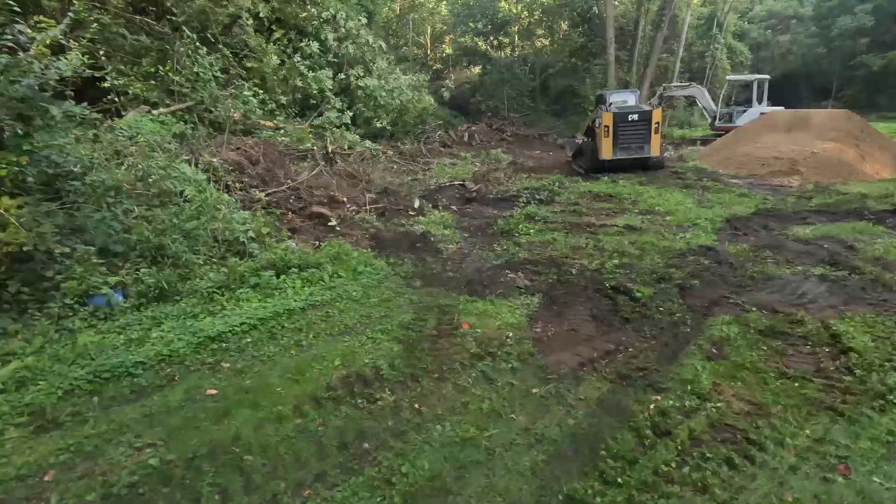We're gonna have a line come out of the house, which is going to be right where that bag's at. We're gonna dig all this up, going all the way back to the tanks back here.

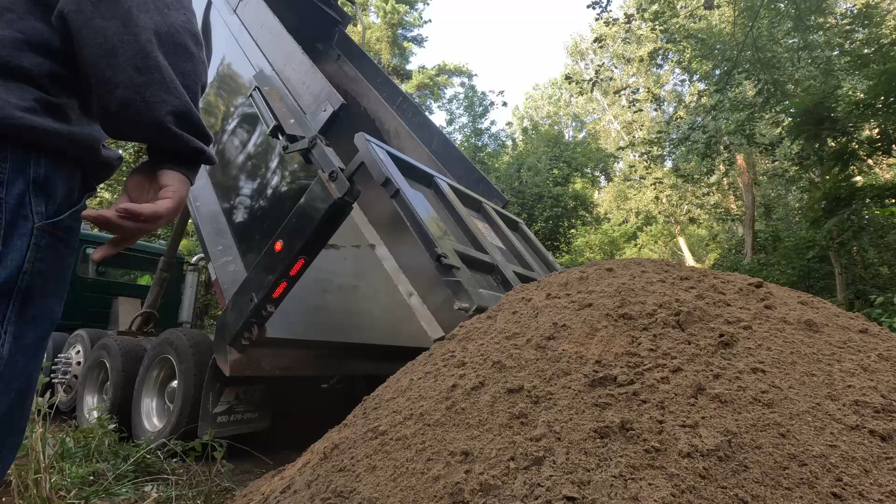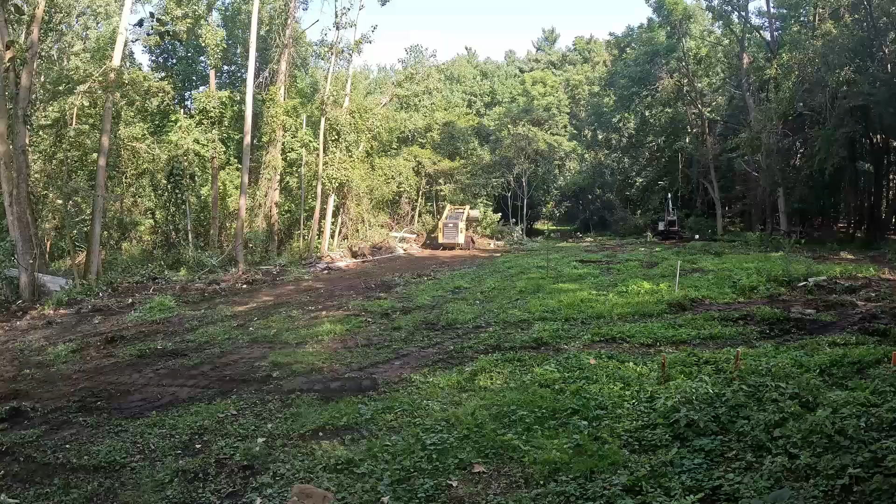Okay, so what we got is a mound system behind me. It's an elevated field system. Here's what it's gonna look like. This is what we get from the health department. You have your house here, you got a septic tank here, and a mound here.

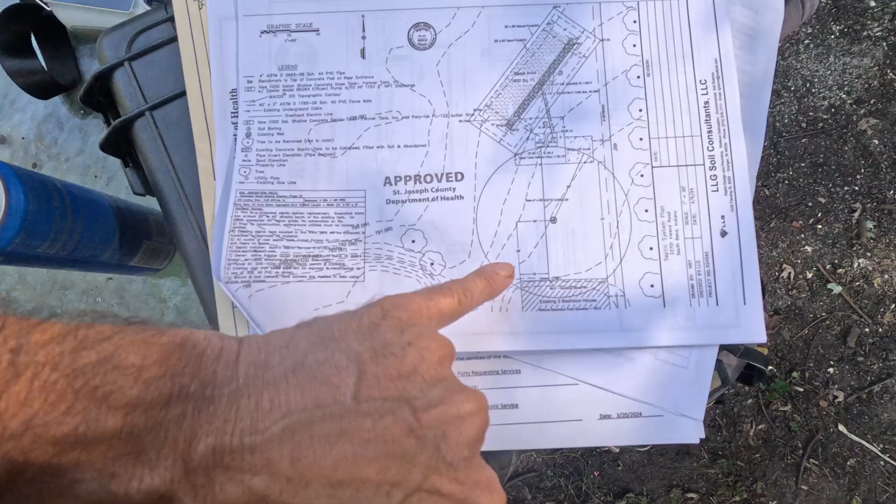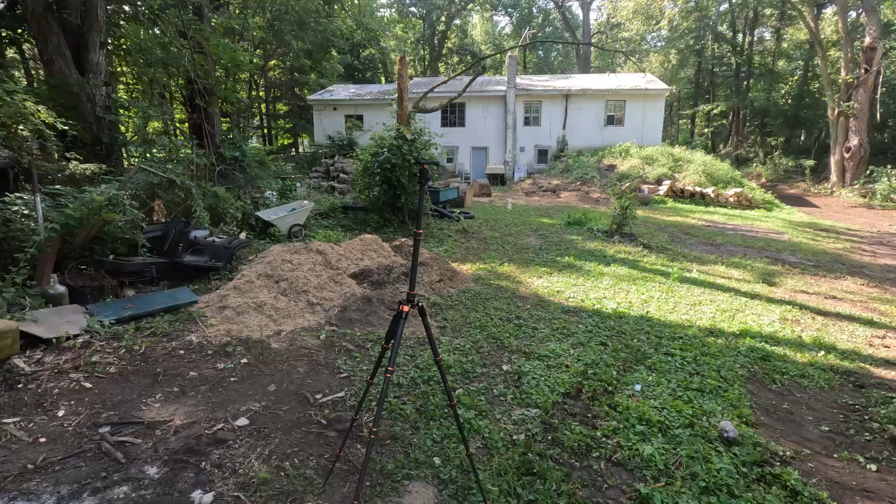So these tanks are right here. There's the house. And we have to be 50 feet from the well. That white thing sticking up is our well. 50 foot is gonna be like right here somewhere.

So once the poop comes from the house, it'll flow down the pipe into the tank, the septic tank. From the septic tank, it flows into the dose tank. From the dose tank, we have a pump inside there that'll pump it out into the mound.

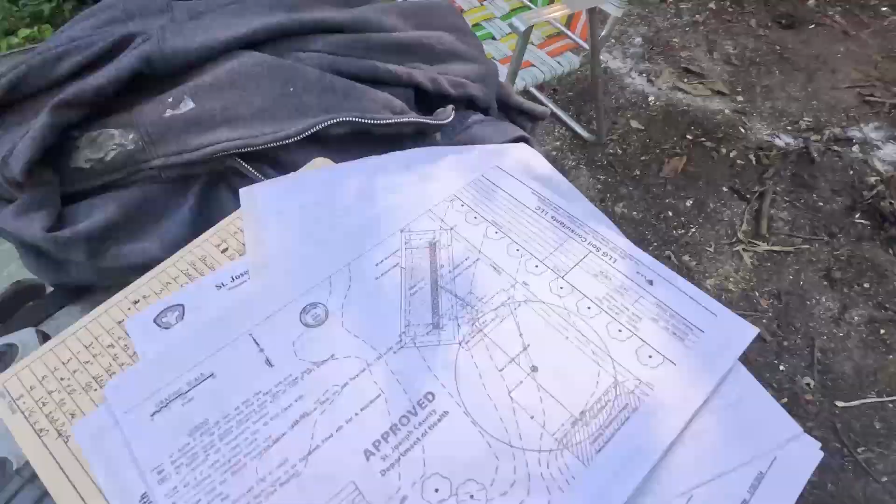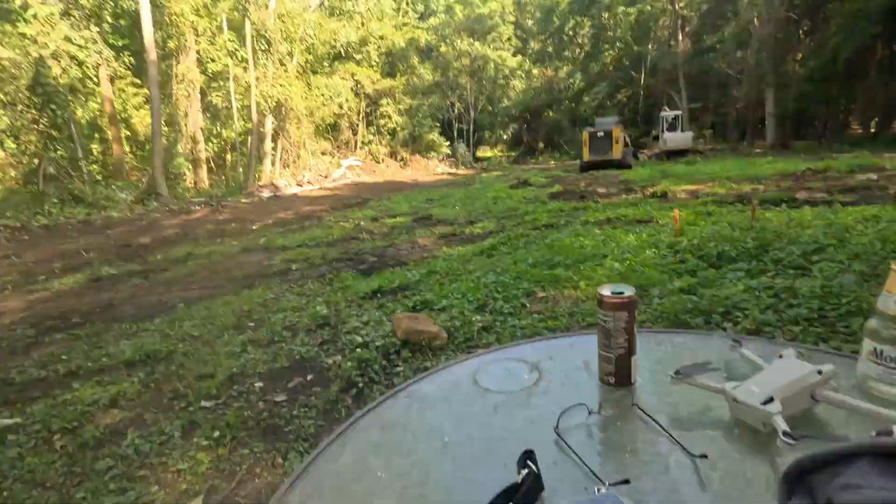So we'll be going from the house, past the well, 50 foot out to the tank. Septic tank, dose tank, right into the center of the mound. From there, it'll pump it up and divide it evenly across your laterals for your system.

Here's our tanks. A 1,000-gallon shallow septic tank and a 1,000-gallon dose tank.

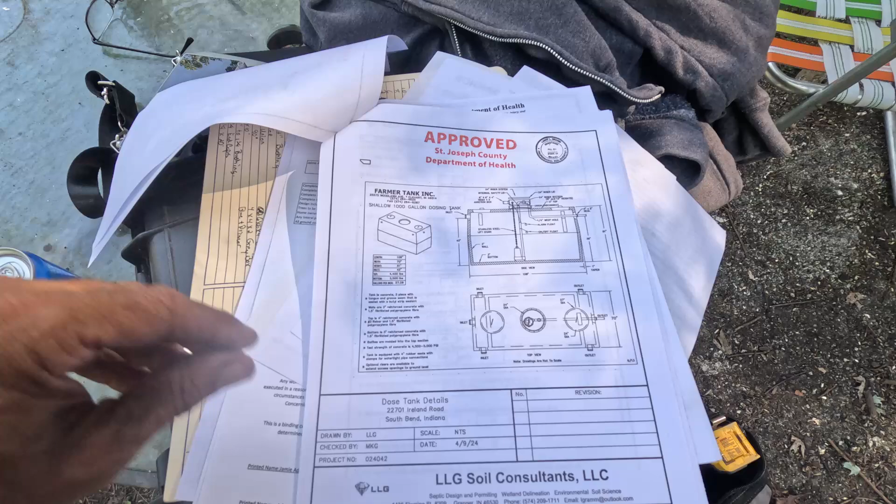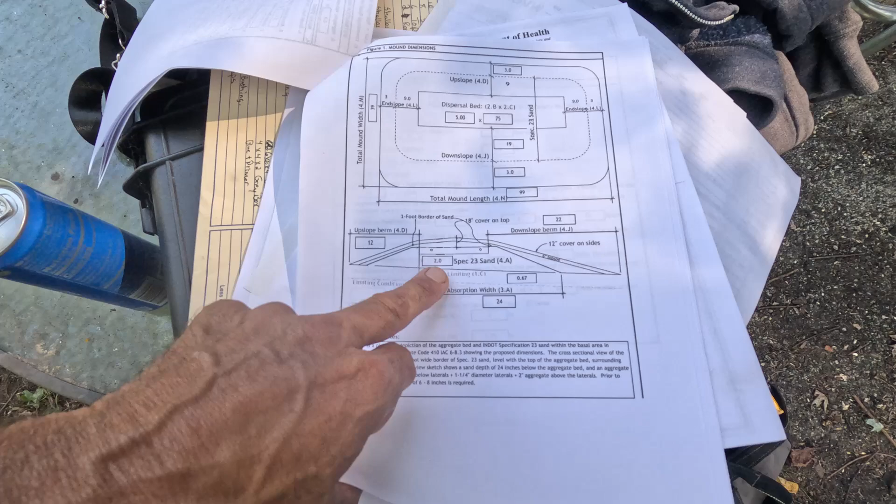Here's all of our numbers we gotta do for the pump curve, there's a mound. It's an upslope mound, and it's got looks like 2 inches additional, no, it's 2 foot. So we got 12 inch additional. So it's actually a pretty good sized mound, pretty tall mound.

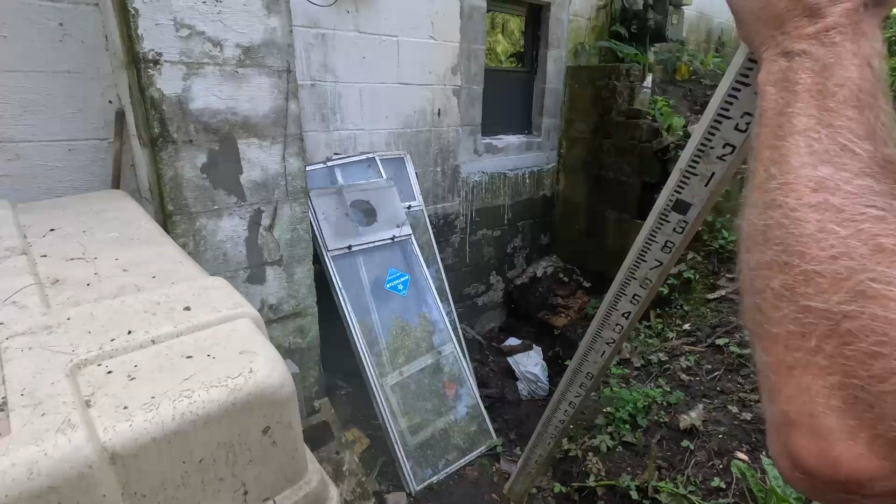So what we have is we have to grab this pipe from the house, and the way to give it fall, we need 4 inches of fall every 25 feet. So we know it's 50 foot, it's actually 75 feet, so we need at least 12 inches of fall from the house to the tank.

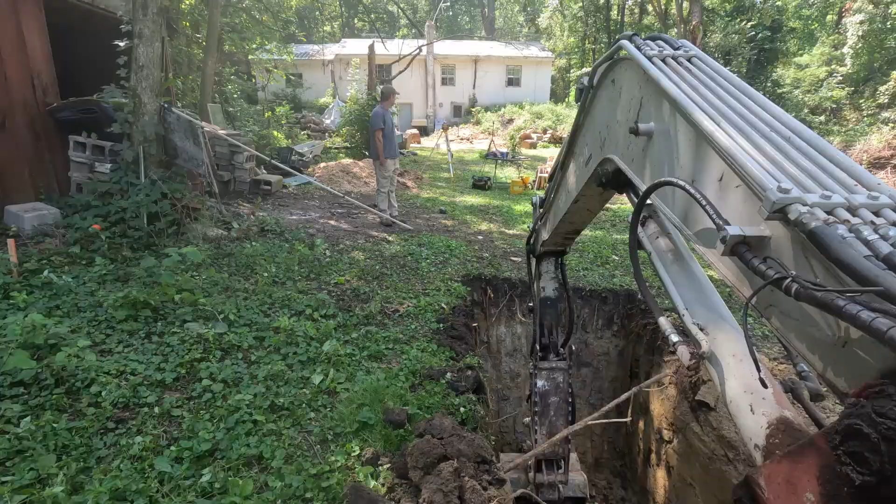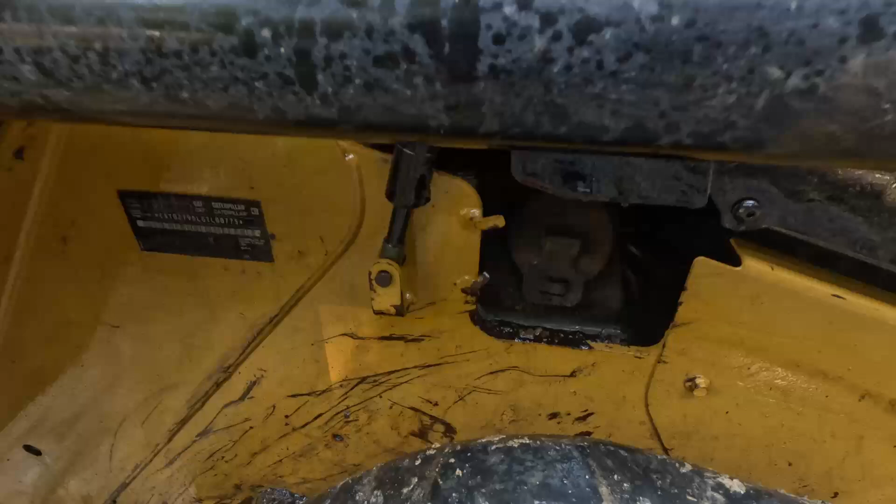Okay, update, maybe done for the day. We blew a line on the skid steer. Hydraulic fluid everywhere. Blew a line right down here. It's rubbing and it blew. What's messed up is that we just did this side like 2 weeks ago. This side blew. We had service come out and replace the lines, and now the other side blew.

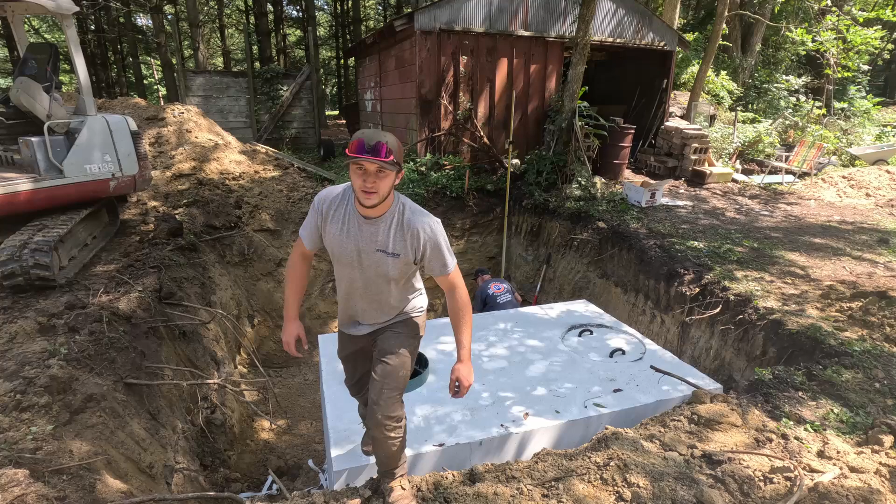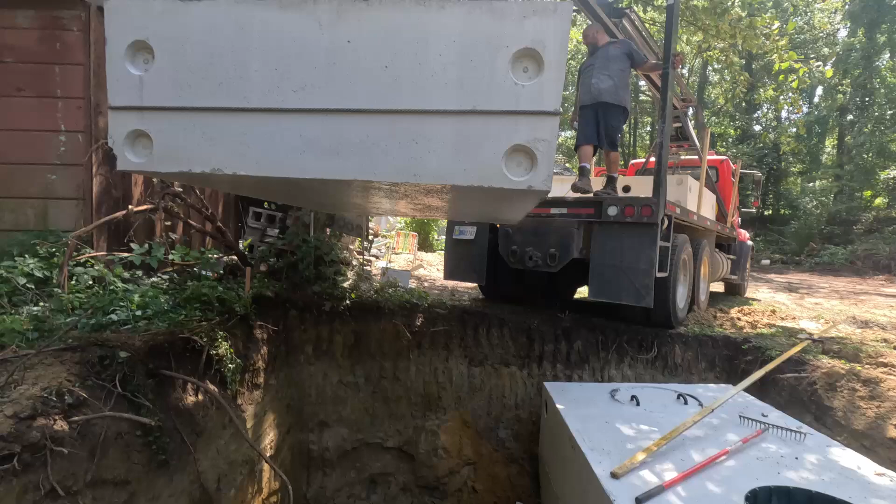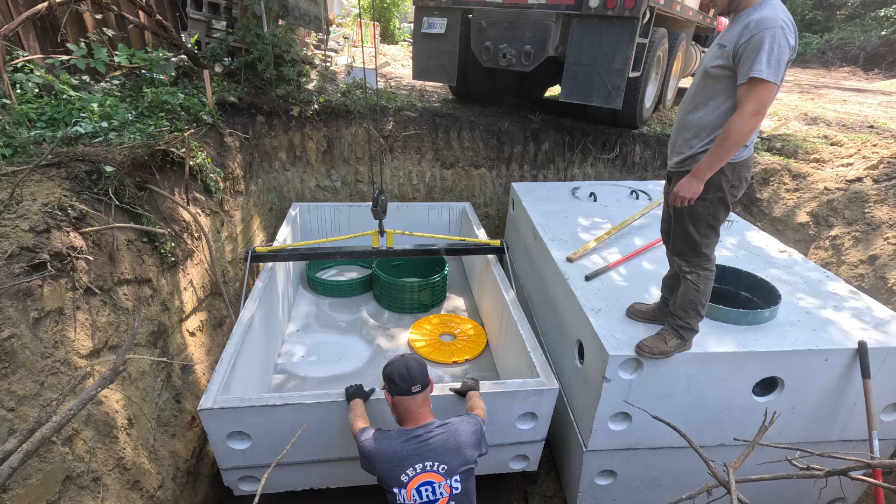One in the ground, one more to go. Alright, well, we'll let it down and then I'll put some flak on it and move. We're gonna hit that front wall. Just here, Jay, just so I can get it down.

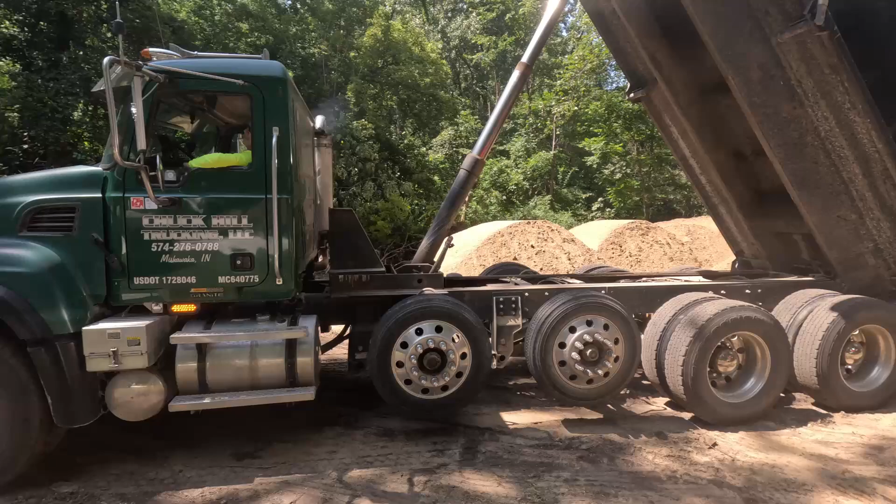Hey guys, well, here's an update. Skid steer broke down, we called it a day. We are going to come back tomorrow and do our force main and probably our supply line from the house to the tank, get that stuff done, and then hopefully the service tech will be out there in a day or two to get the skid steer fixed. If not, we'll bounce around, hit a couple different jobs, and then come back to the job and knock her out here in a few days.

Good morning, it is Monday morning. We are back in the mound. We had the skid steer fixed Friday afternoon, so we can get back to work today. I don't think we're done yet.

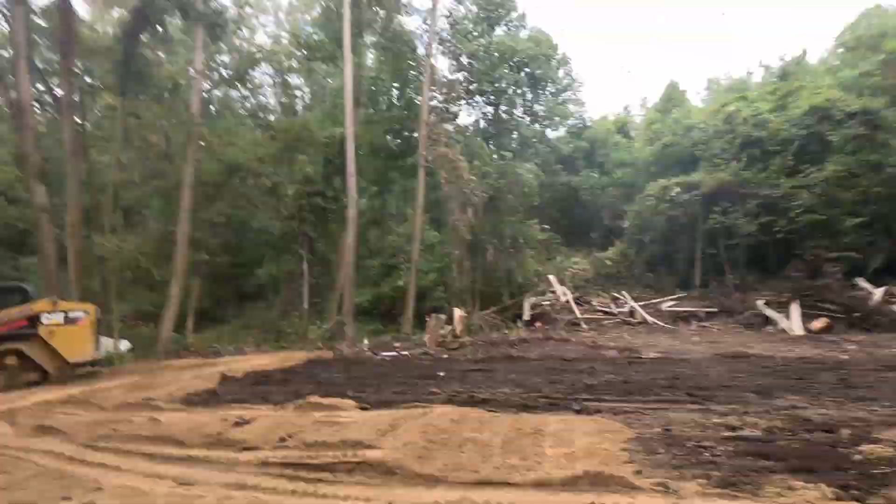Okay, so we had an inspection today. It was a rip inspection. So what we have to do for inspection is you got to plow the ground. They want to plow it down, I think it's 7 to 14 inches, I believe. So we took our ripper there, and we ended up just dragging it and ripping the ground.

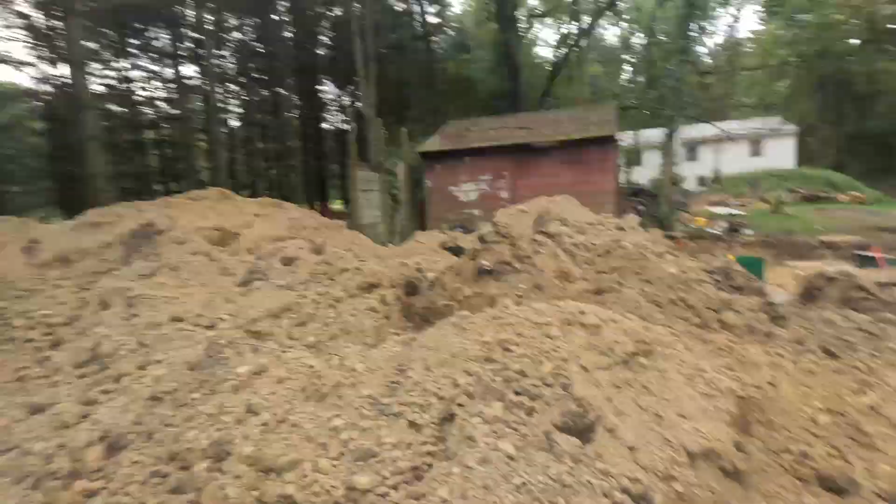Then we got Keegan, he's got to throw 6 inches of sand on the base, and we can't drive over the actual tilled up part. We got to drive on the sand itself. Once he gets that done, what we'll do is we'll lay the ag bed out, and we'll start throwing sand and rock in for your ag bed.

And then tomorrow we'll have inspection, a lateral inspection tomorrow.

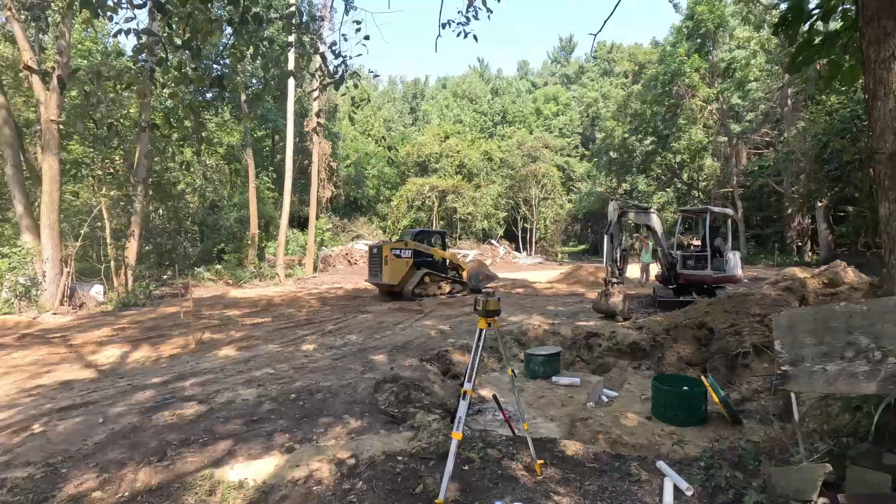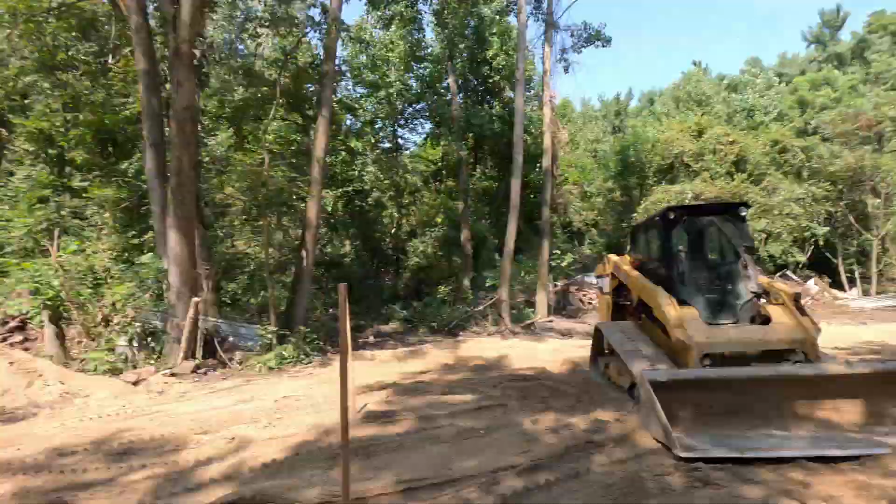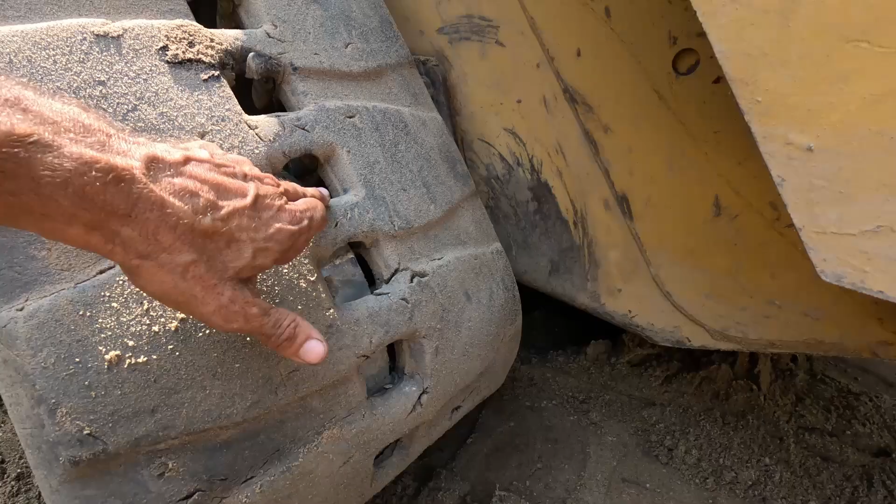Okay, here's a mound update. I think this property is the Indian burial ground, so we're having some bad luck here. The cat guys just came out, got the track fixed, or I mean, sorry, got the hose fixed on the outside. Then we're driving today, see that big old bulge there in that tire? That track I mean, this big old bulge ain't supposed to be here.

What happened is the bar in the middle blew out, so our track's gonna come off, so we are stopping again. This is breakdown number 2 on this mound, breakdown number 3 for this year on that machine. Buy a cat, they're good, but they're gonna be expensive when they break, that's for damn sure.

Good Friday morning for a holiday weekend. Today's plan is to put our new tracks on our skid steer.

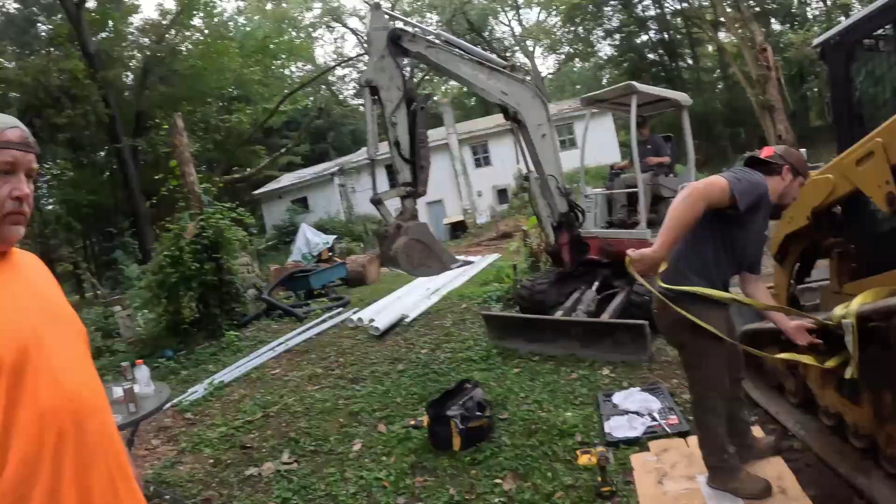So we got to raise that track up to pull those together to pull the track off. What we got to do is by raising the rubber up, we're going to collapse this in, which pushes the grease out. That'll give us room to slide the track off. We should go in probably about 2 inches, looks like. Yeah, maybe, it looks like it's going roughly about 2 inches.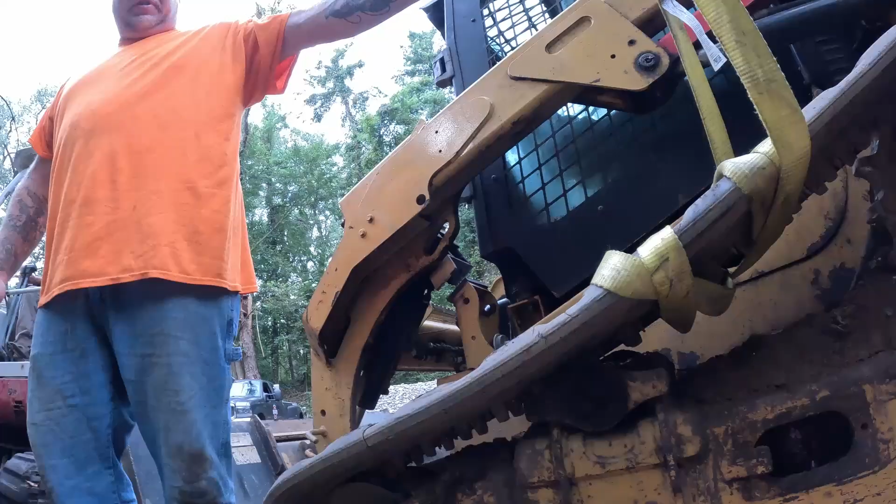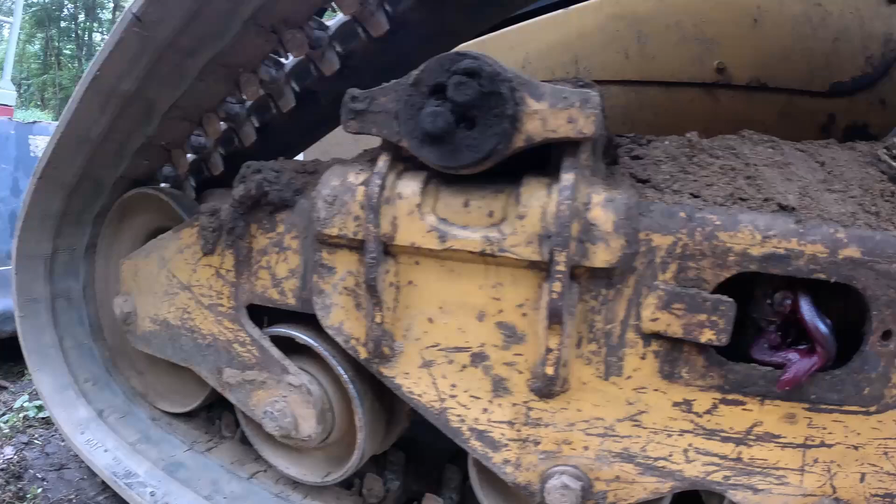But this here slides inside that cavity, and it's pressured by grease. So as we pull up on this, pull up on this with the excavator, it will sandwich this together. May even show up a little bit more. Keep it going, nice and easy. That's pulling in, the grease is oozing out. Look at all that grease.

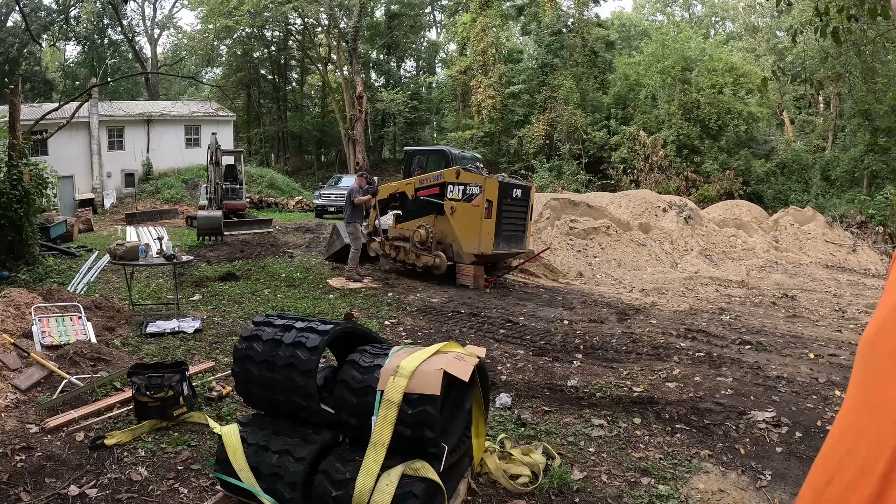So as you can see, we got the tracks off on this side. Here's the new tracks right here. Can you see them? There we go. We got new tracks right here, we're gonna put them on. That was kind of a pain in the ass because we're on unstable ground, but we'll get her on.

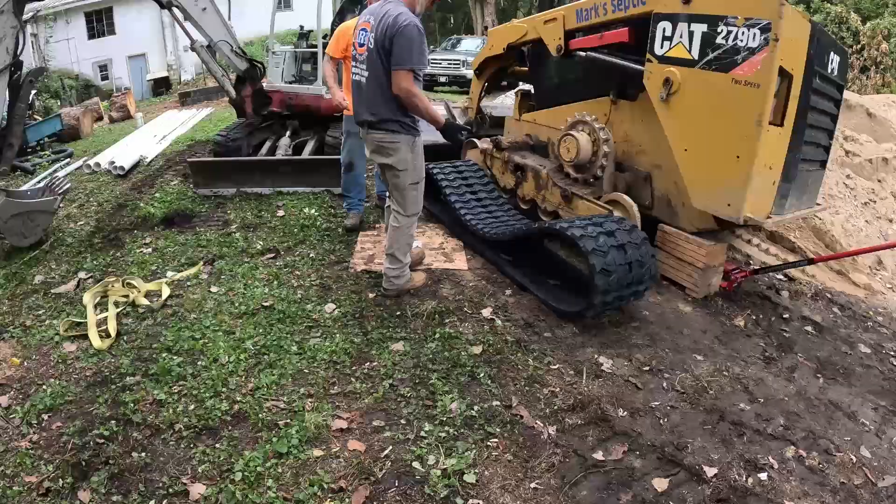Look at those pretty shoes. Nice. All right, now comes the fun part.

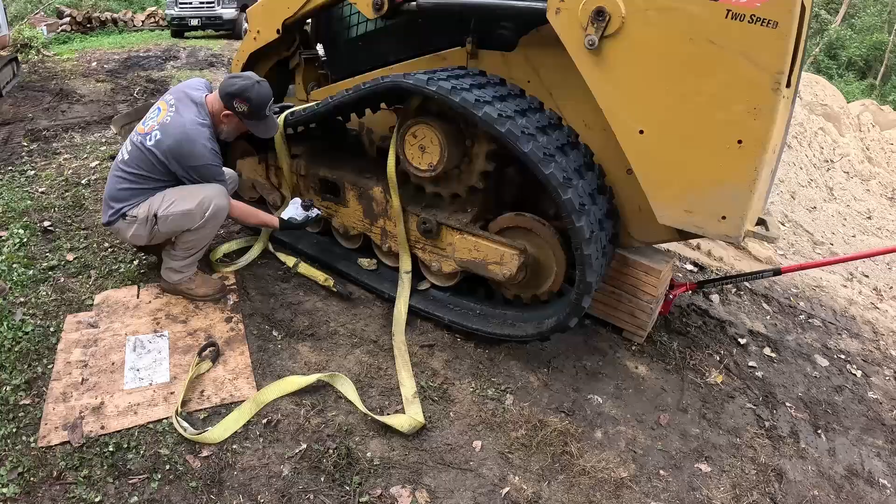Looks weird. New shoes. Skinny and Hefe did it again. Oh, Hefe and Skinny, saved the day.

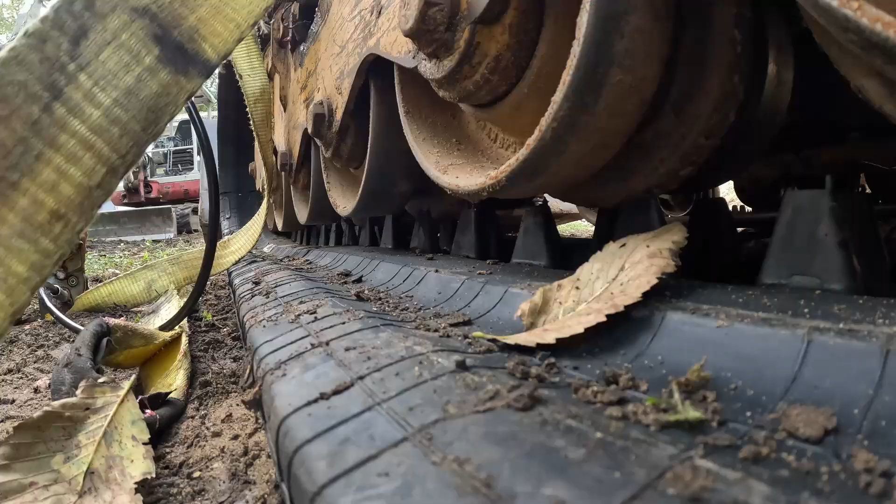Okay, by putting grease inside there, inside his grease joint, it's stretching that piece out, which is causing this to tighten up here, which also causing this to go straight.

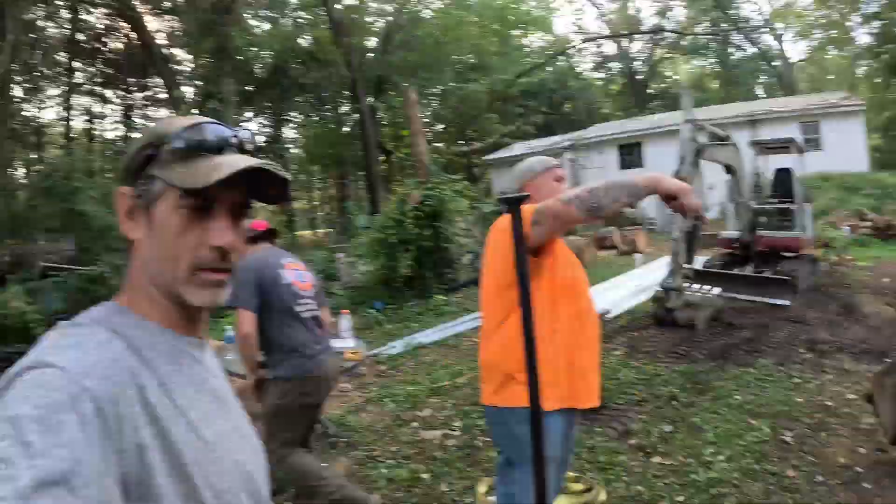Beautiful. Let that come around, we'll spin them over around. Beautiful, beautiful, that's how you do it. Probably not the correct way, but that's how we do it. Back it in. All right, side one's done. We're gonna flip around and do side two.

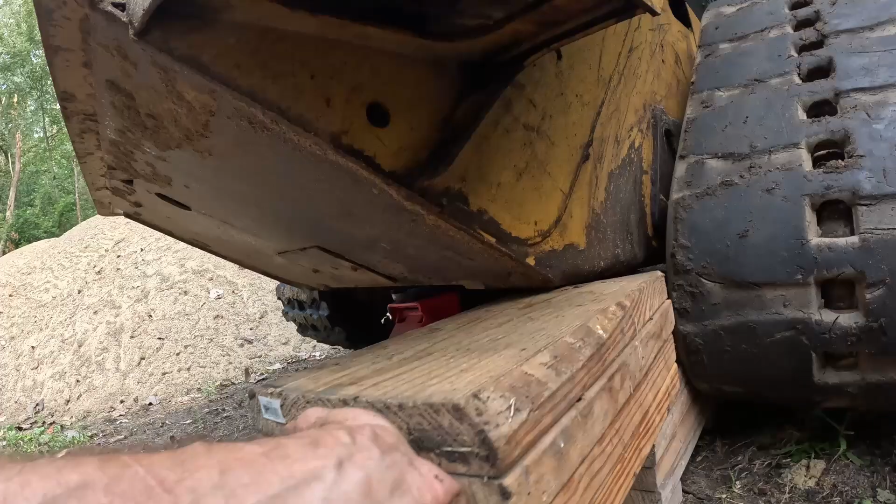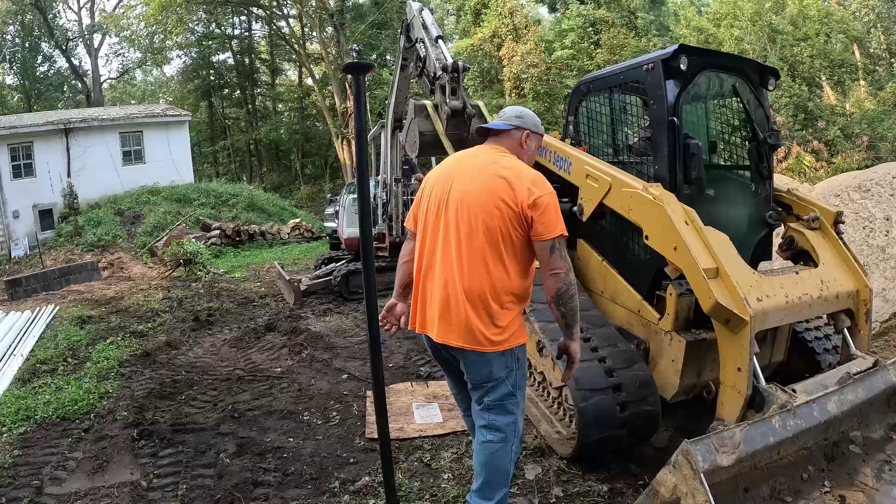First slide. Slide this one. Yeah, you're sliding. There you go, it's coming out. Track's going in, watch yourself. Watch yourself. One more. There you go, right there. All right, you got it, Keegan.

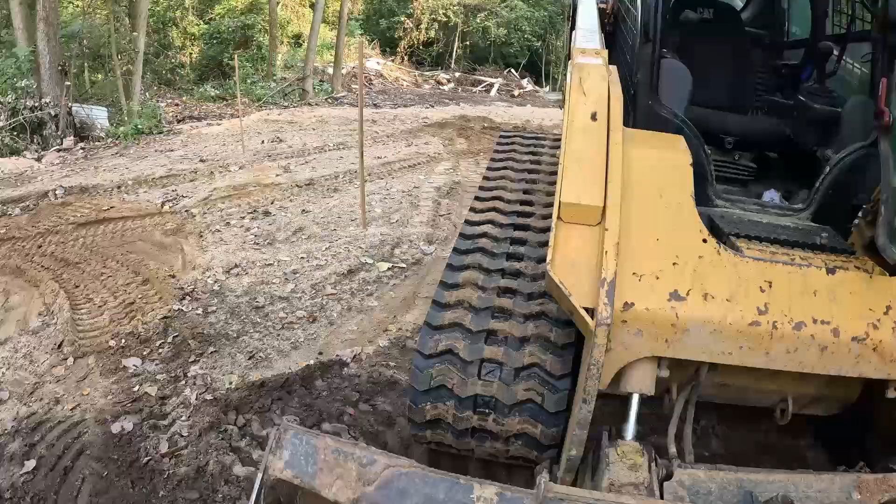Tracks are on, skiddy's done. See if it doesn't break down again.

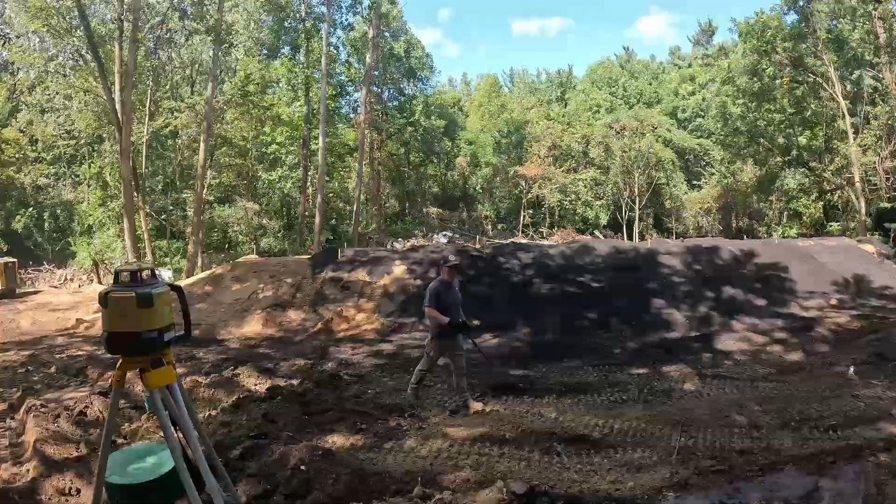Okay, we are done for the day. It's what, Thursday, about 4 o'clock. Got a mound update, still the mound. Some more bad luck with the skid steer, we can't catch a break in this job. We just broke down again. This is the 3rd breakdown on this job and the 4th breakdown on that skid steer in a month. Buy a cat, they're good. They fucking break down all the time.

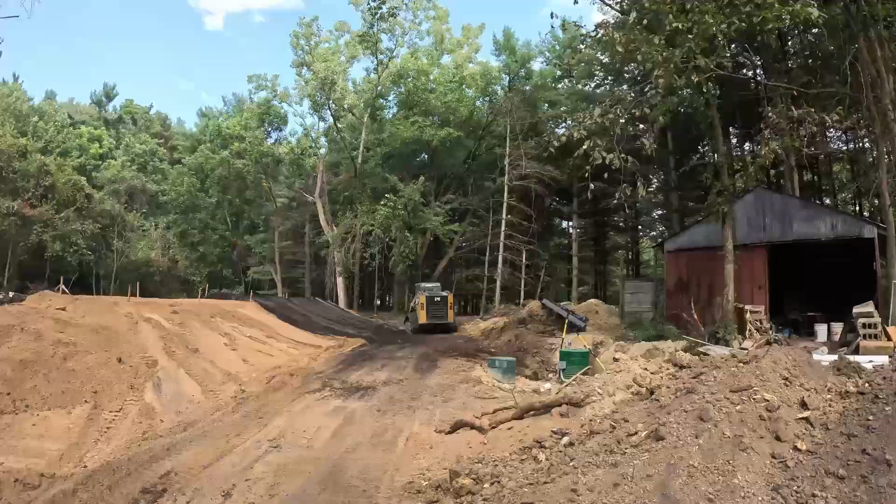So let me show what we got. I think my screen might look dirty. Let me show what we got in this thing here. You see how the tracks lean to the left. Driver's side track, driver's side tracks lean to the left.

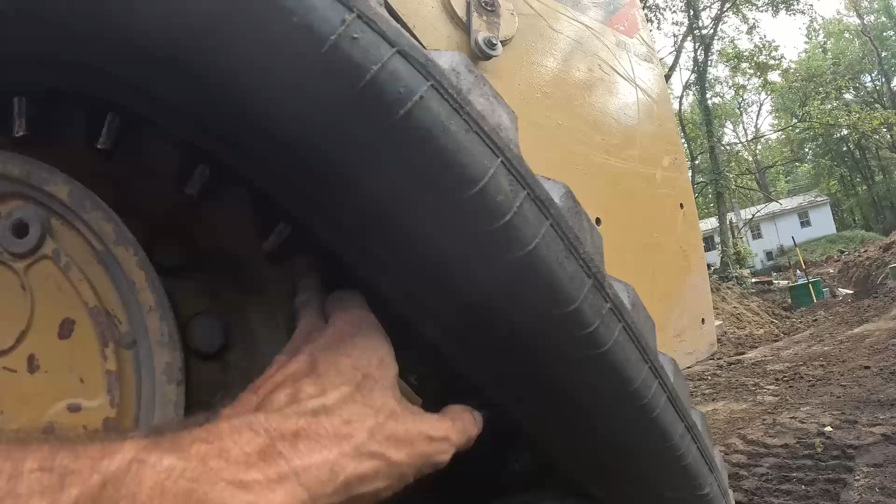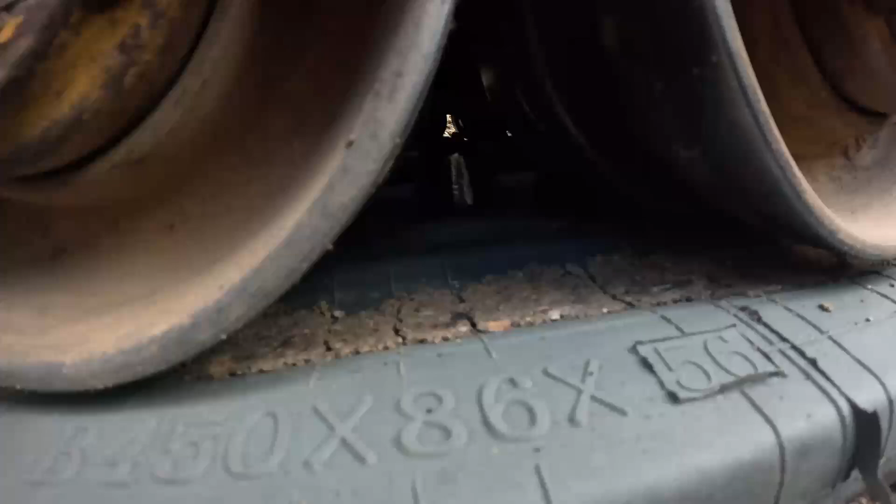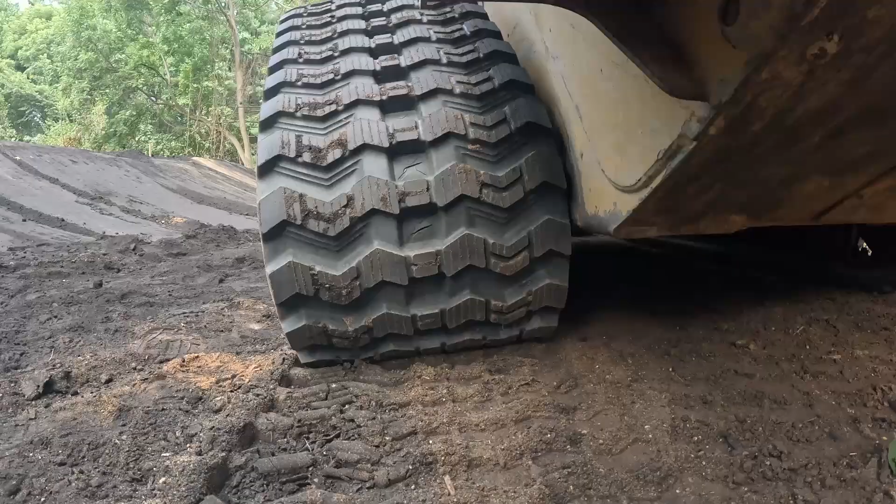Hopefully the only issue we have is jump track. This side here, this should be on this side here. This should be on this side. These two should be in the middle here. They are completely jumped on the other side, which means all these bottom ones down here, it's got to go around here. And looking at it, you can see what it did.

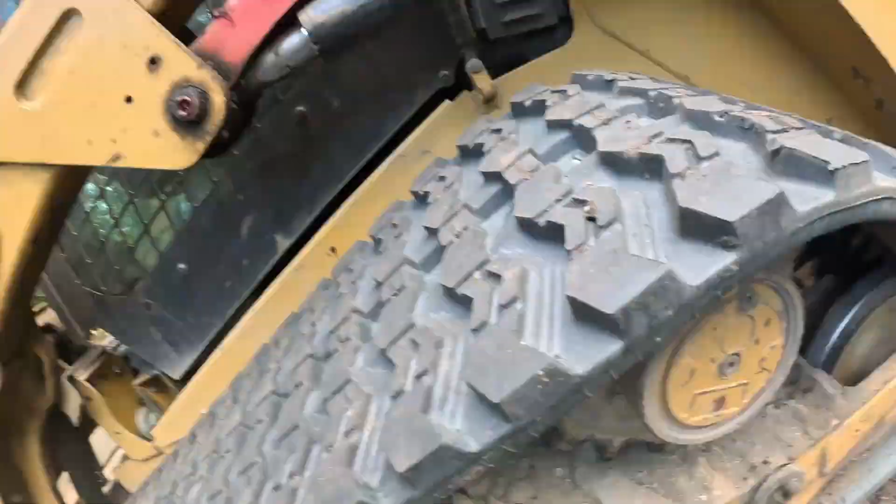I also have this gap here, which scares me. I hope I didn't break an axle. Well, tomorrow we'll jack it up and see what we got in the morning.

As far as we got, about half the black, not even half the black dirt on, about a quarter of the black dirt on. We got the plumbing done, the electricals, conduits ran. We got pull wire tomorrow.

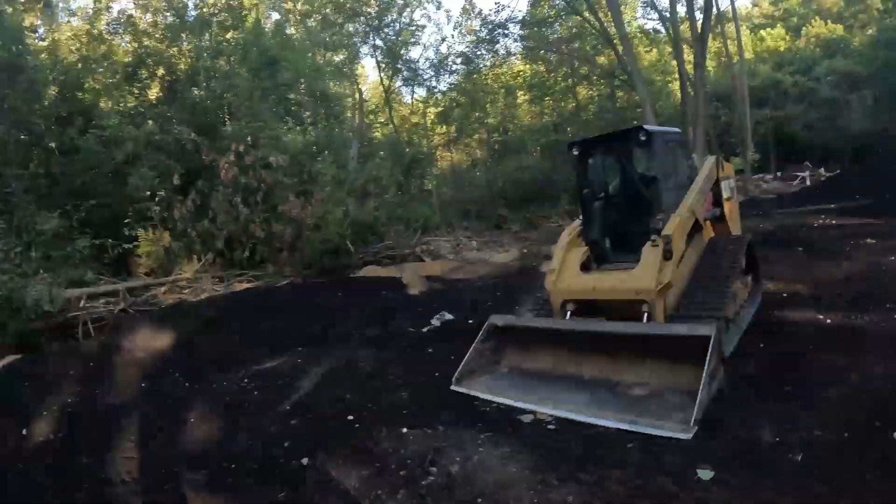We got it about done. All we got to do is finish hand raking a little bit. Then we got to seed and straw and then just level out the yard. Clean up a little bit - clean up a lot, I should say.

Back on the mound, one more day. We gotta plug these tanks.

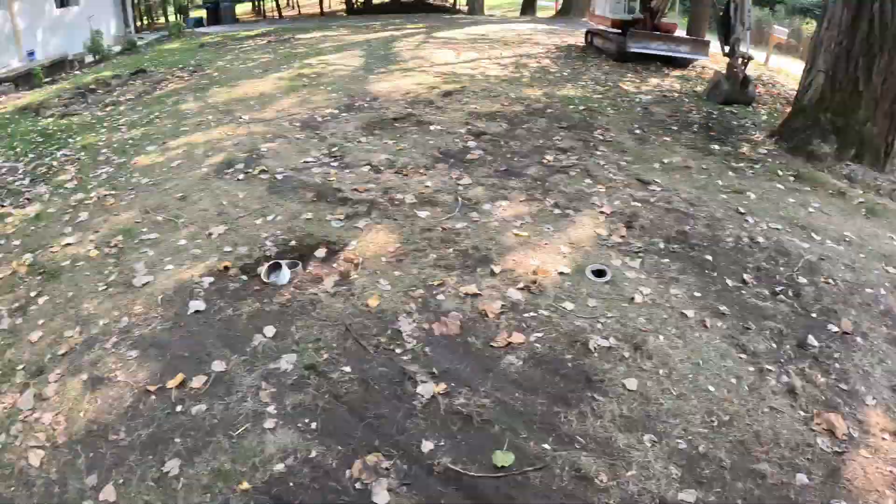Well, NIPSCO's supposed to come out and mark this again. They never did, so of course, like always, they're behind on their locates like by a week. We have a gas line coming right across here somewhere, edge of the tank. Now NIPSCO should never have buried the gas line on top of the tank.

So let's see if we hit it or not. We're probably gonna hit this line, I'm sure it's gonna be a big old mess. We'll give it a try, see what we can get without damaging it. You can see a line come here, service here, right across here, across here. Tank's right here.

It's a plus, we didn't hit a gas line. Nope. No NIPSCO here. So, okay, I'm running this thing over.

When you guys are done, I'll probably - you can take off if you need, doesn't matter. Just make sure you clean the yard up a little bit, ready these tracks up, clean stuff up a little bit, make sure it looks pretty.

On the road, drop machine off at another job. That was about 20 minutes, 22 minutes to do that. They're gonna finish up grading that job out, finish filling that dry well. I'm gonna drop off the Mini on another job, I'll come back, grab the skid steer, and probably just take that back to the house tonight.